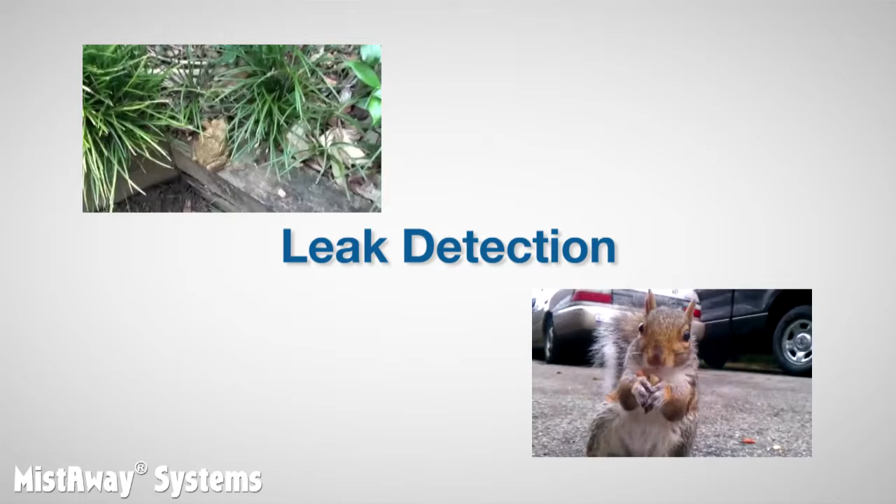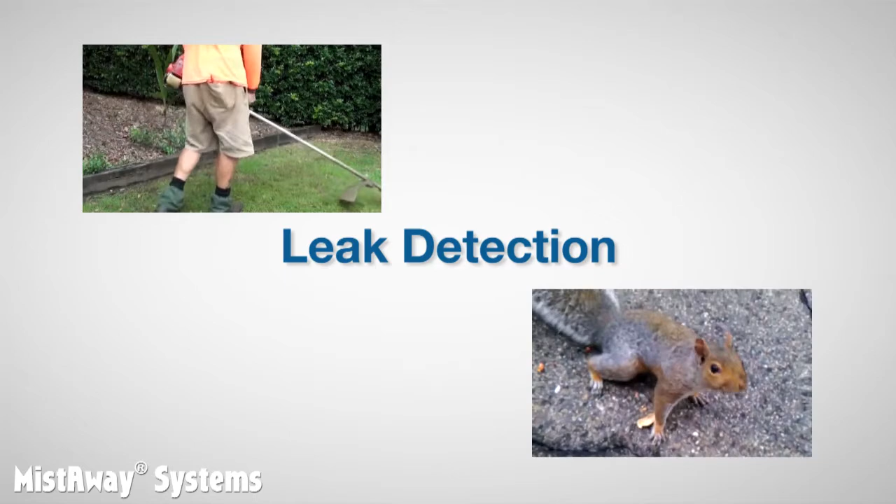And without the ability to detect a leak and shut itself off, a unit can empty itself in just a few mist cycles. Before we jump into discussing how leak detection works in the equipment, let's spend a minute contrasting a leak with the controlled flow that comes out of a nozzle during a mist cycle.

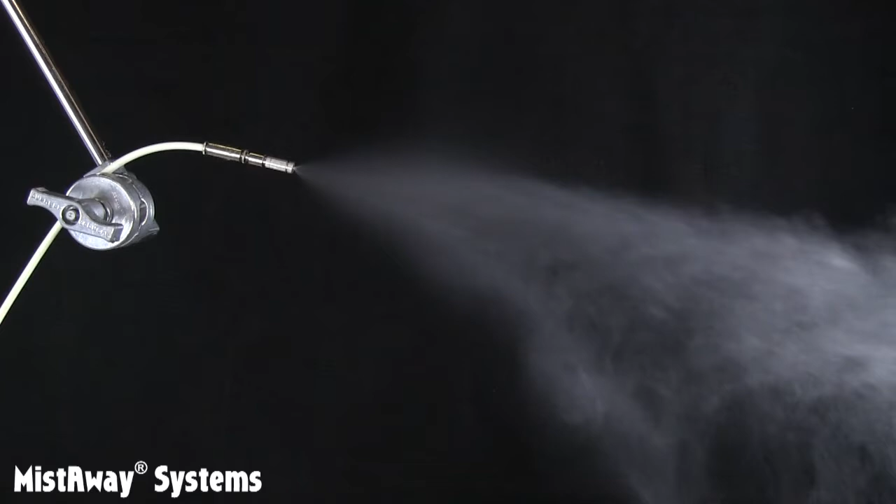Let's start by observing and measuring the controlled flow from a working nozzle. We've set the pressure at the pump so that this nozzle is operating at 200 psi. If we hold this graduated cylinder under the nozzle while it is misting, like so, and remove it after 60 seconds and read it, we'll know the flow rate out of that nozzle, 45 milliliters in a minute, right where it should be based on the chart we introduced in the fundamentals videos.

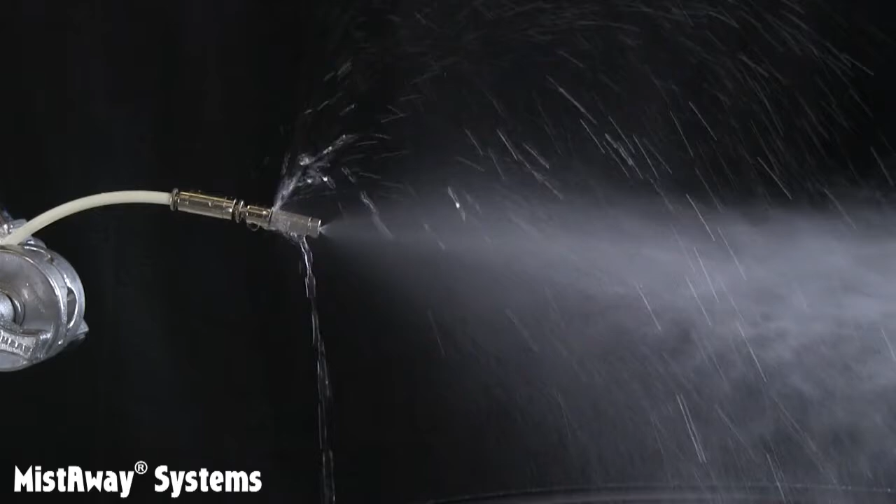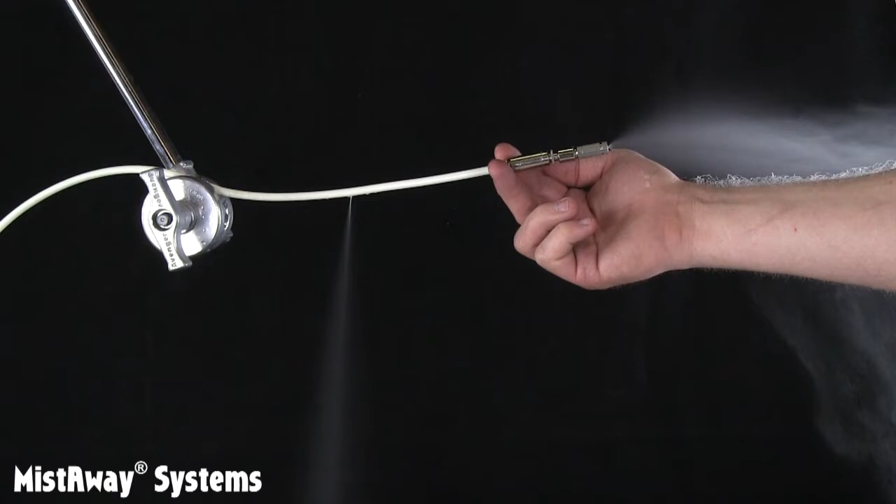Now let's loosen the nozzle tip a bit and simulate a substantial leak, like this. Let's measure this for 30 seconds. 900 milliliters in 30 seconds translates to 1,800 milliliters in 1 minute. Now let's try doing the same thing with a pinhole leak, like this one. 300 milliliters in 1 minute.

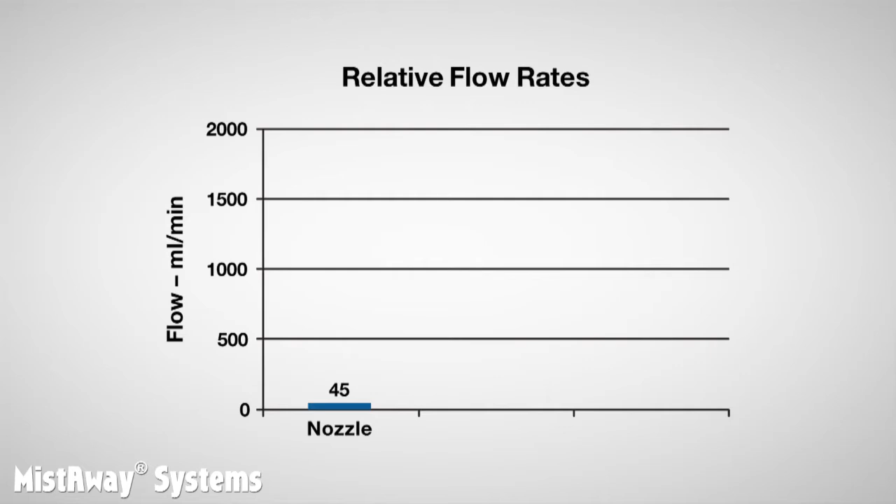So our single working nozzle flowed at 45 milliliters per minute. Our pinhole flowed at 300 milliliters per minute, about 7 times what our working nozzle flowed. And our large leak flowed at 1,800 milliliters per minute, about 40 times what our normal working nozzle flowed. What can you conclude from this? Well, there is a lot more flow from a nozzle circuit with a leak than the predictable flow of the same nozzle circuit without a leak. And that is the insight that MistAway's leak detection is based on.

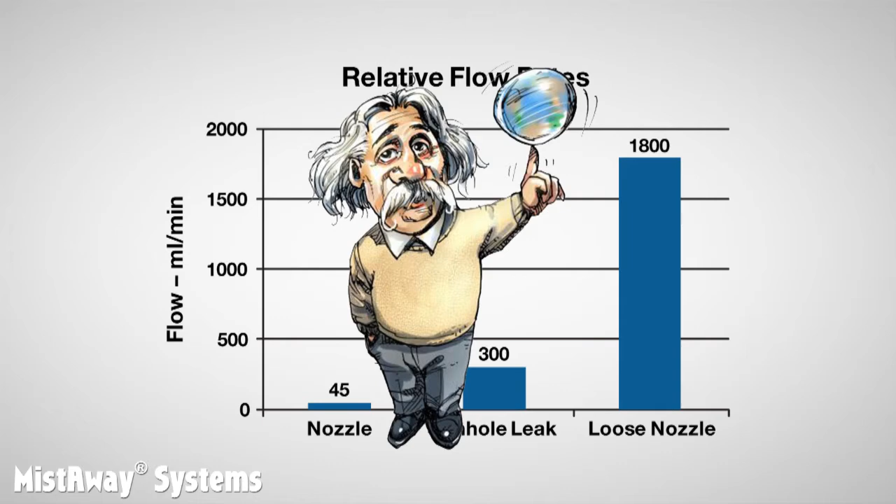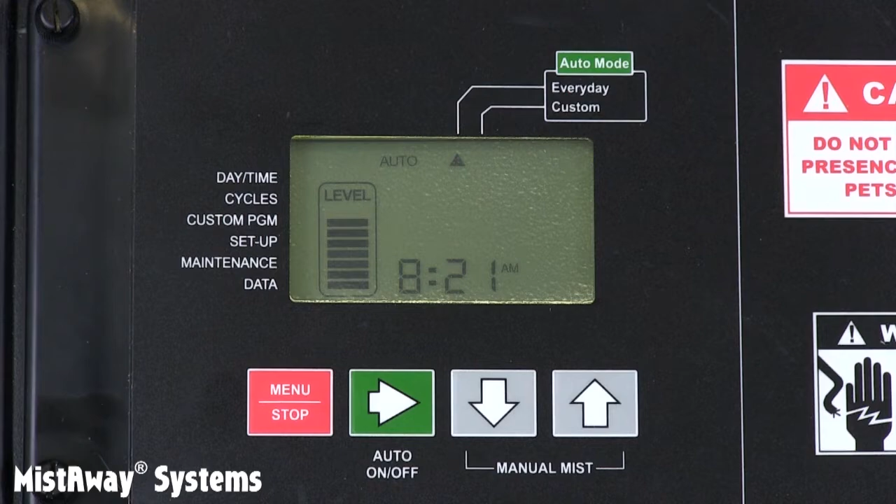Brilliant, right? So leak detection works by comparing a predicted flow to an actual flow after each mist cycle. If the actual flow is much greater than the predicted flow, the controller detects a leak. The unit shuts down and flashes error 3 until it is manually reset. So let's talk first about predicted flow, then actual flow, and then how the controller makes the comparison.

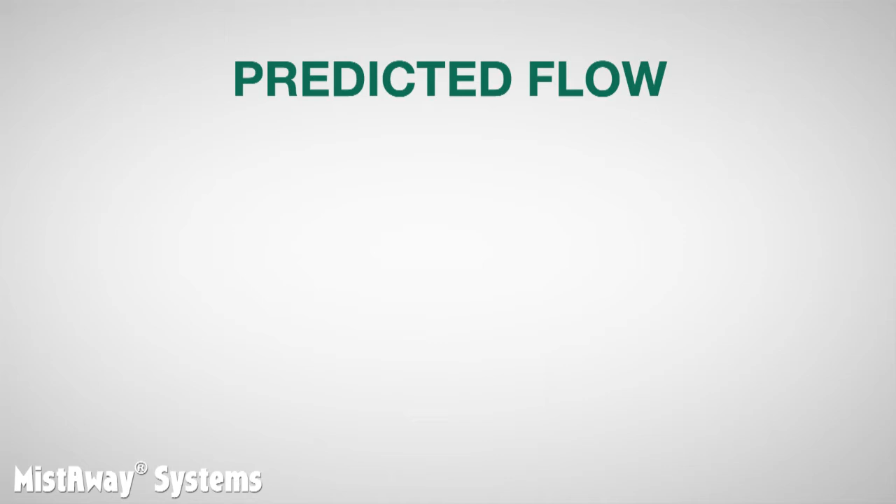The controller calculates the predicted flow from a nozzle circuit by multiplying 3 variables together, all of which it knows because they are programmed into its memory. First, what is the flow rate of the average nozzle? As we discussed in the fundamentals videos, if the nozzle circuit is installed as it should be, the flow rate is pretty guessable, about 40 milliliters per minute. In another video, we'll tell you how you can calibrate the flow rate of your nozzle circuit and change the average flow rate value, what we call the AFR, in the data menu of the controller, so that it reflects the average nozzle flow rate on your installation.

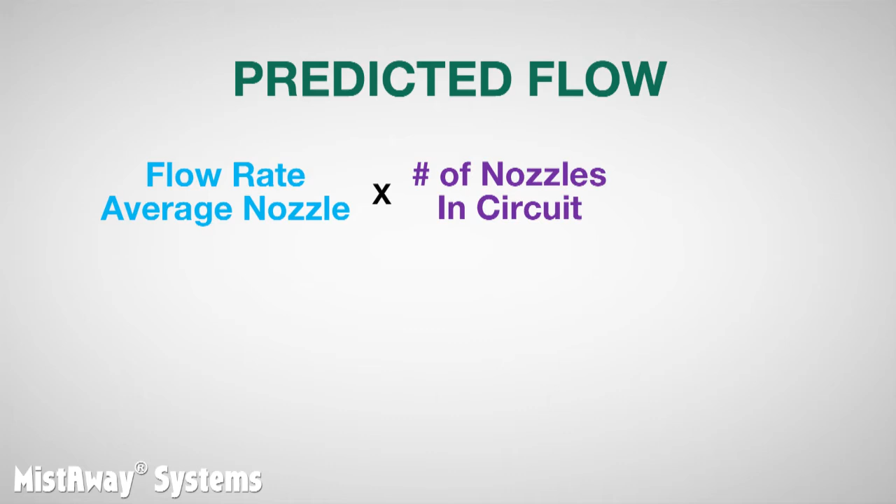Second, how many nozzles are installed? You can count them, and you're required to program that number into the controller during the setup process. And third, how long was the mist duration? Whether it was a scheduled mist or a remote mist, that number is knowable because it is programmed into the controller, again during setup. Multiply these 3 values together to calculate the predicted flow.

A sample calculation for predicted flow for a 40 nozzle circuit, misting 40 milliliters per minute per nozzle for 1 minute would be 1,600 milliliters. Now let's talk about how the controller gets the actual flow to compare to the predicted flow.

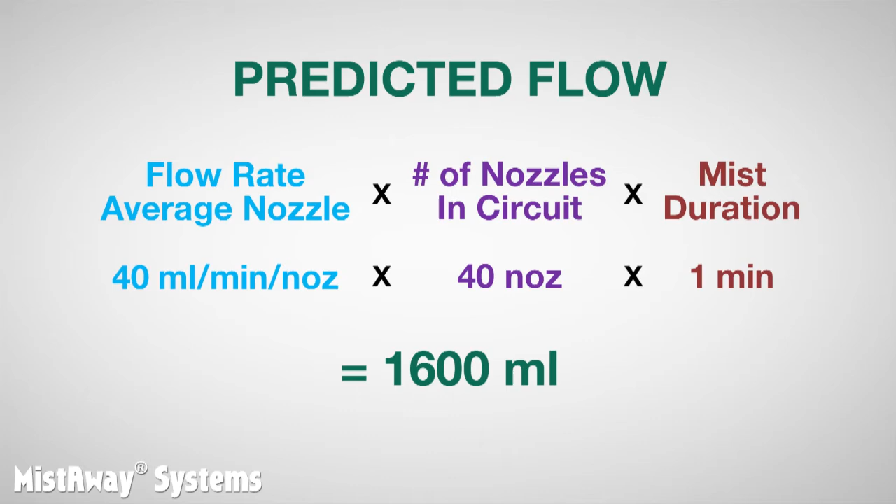The controller obtains its flow information from an electronic flow meter that looks like this. Water passing through a pinwheel in the meter causes the wheel to turn. Magnets on the outside perimeter of the spinning wheel create electronic signals that are counted and accumulated by the controller. The controller then turns that accumulated count into an estimation of the flow. Generally, for the flows we see in our systems, it is very accurate.

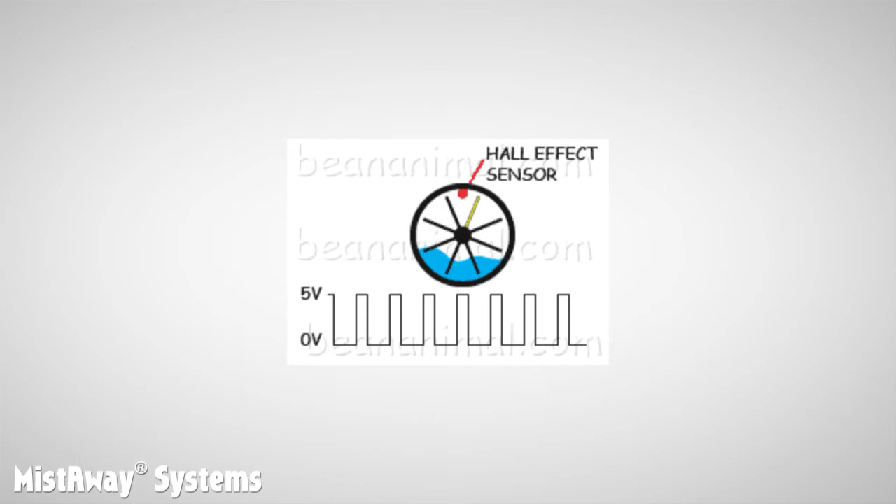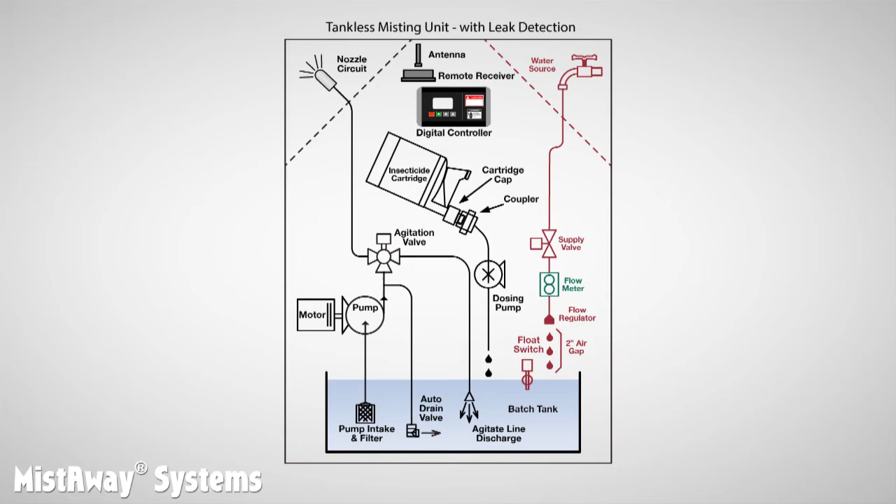But it also checks the value against the predicted flow. So this is an indirect measurement, since it's not actually reading the flow through the nozzle circuit, but rather it's reading the flow of the inlet water to replace what was misted out in the previous mist cycle. So we've established how the controller arrives at the predicted flow, which it calculates, and the actual flow, which it measures. Now let's talk about the comparison it makes.

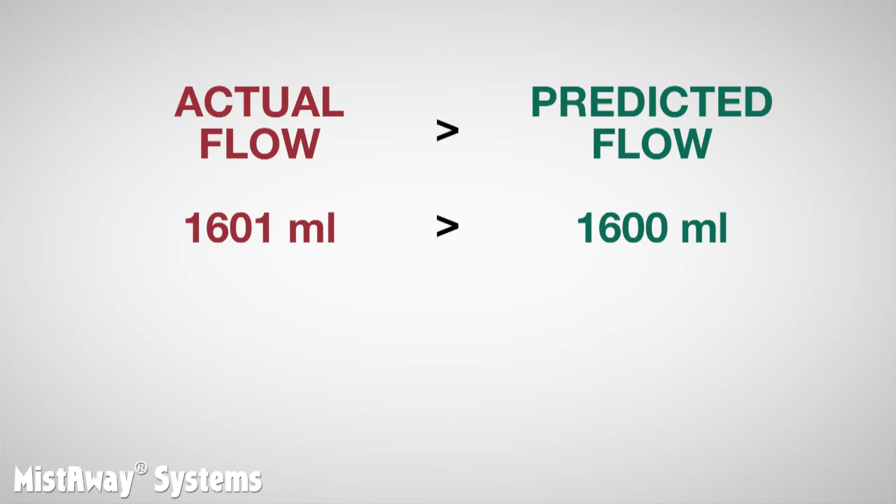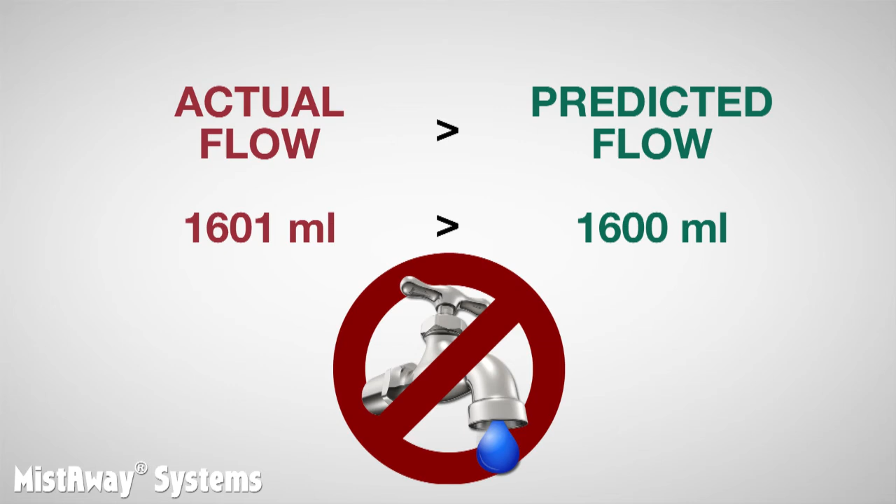Let's say the actual flow read by the controller was 1,601 milliliters, and the predicted flow calculated out to 1,600 milliliters as we did it before. Well, the actual flow is greater than the predicted flow. But would we want the controller to think it has a leak and shut the unit down? No. The difference needs to be much greater. There is the potential for error in both values. The estimated average nozzle flow rate and the predicted flow calculation could be a little wrong. Or like any physical measuring device, there could be errors in the flow meter reading and the actual flow.

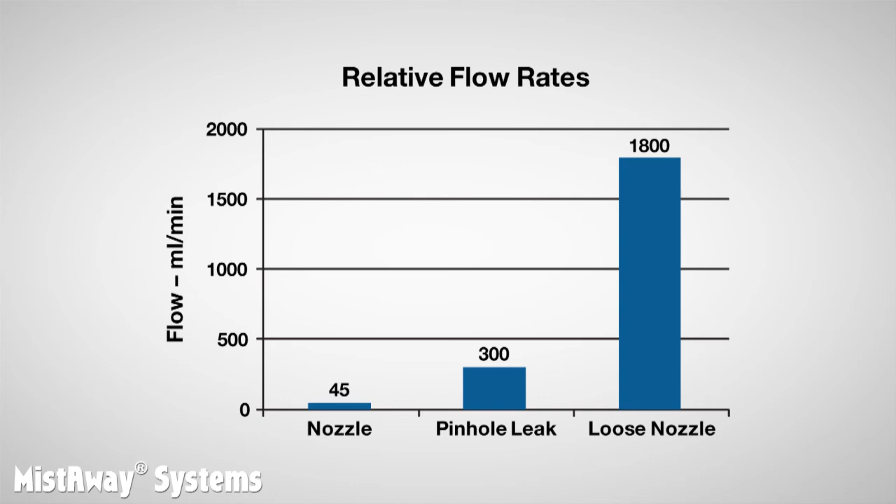Besides, as we learned at the beginning of the video, leaks aren't usually subtle things. When you've got a leak, there's likely to be a big difference between the actual and predicted flow. So to make sure the unit doesn't make that error in judgment, we apply what we call a tolerance factor to the comparison. This factor is expressed as a percentage of the predicted flow, and its default value is 75%. For the unit to register a leak, the actual flow has to be greater than 175% of the predicted flow.

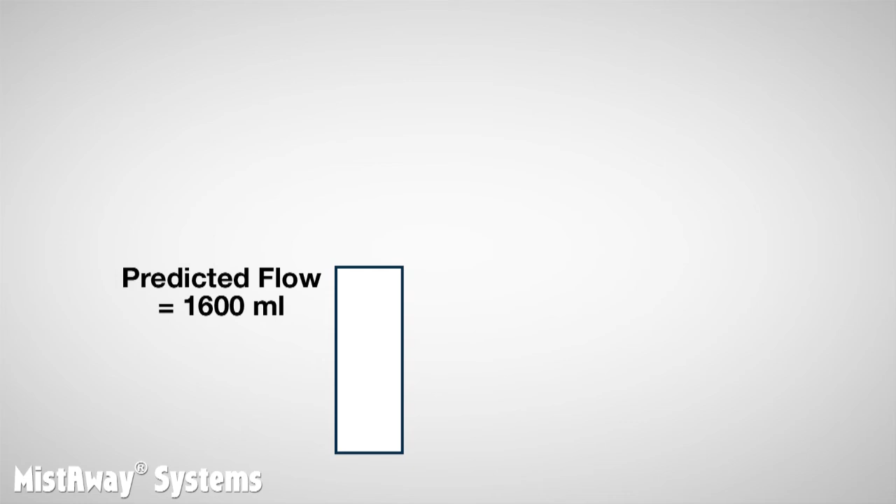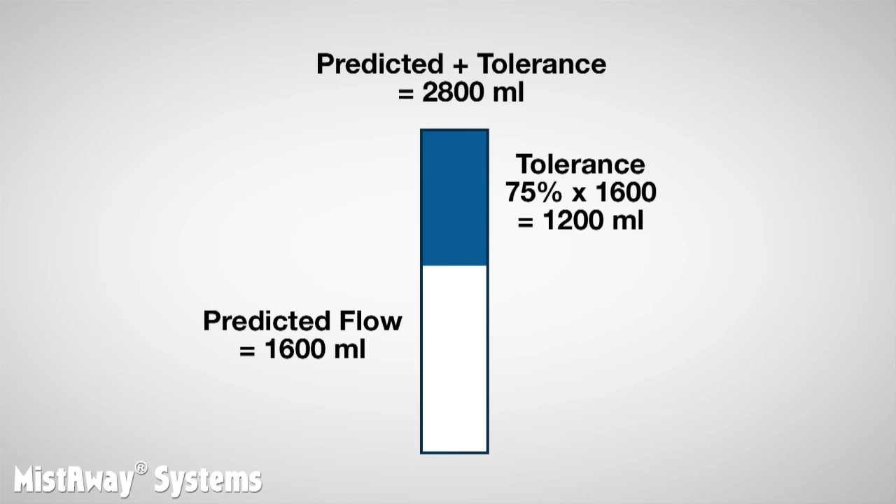To illustrate, let's go back to our example where the predicted flow was 1,600 milliliters. We calculate the tolerance as 1,200, which is 75% of 1,600. Then we add that to the predicted flow to get 2,800 milliliters. Now let's say the unit runs and the flow meter returns an actual flow of 2,000 milliliters. The controller then compares the actual flow to our 2,800 milliliter threshold. Since 2,000 is less than 2,800, the unit determines there is no leak, even though the actual flow is larger than our 1,600 milliliters of predicted flow. It was still within our tolerance.

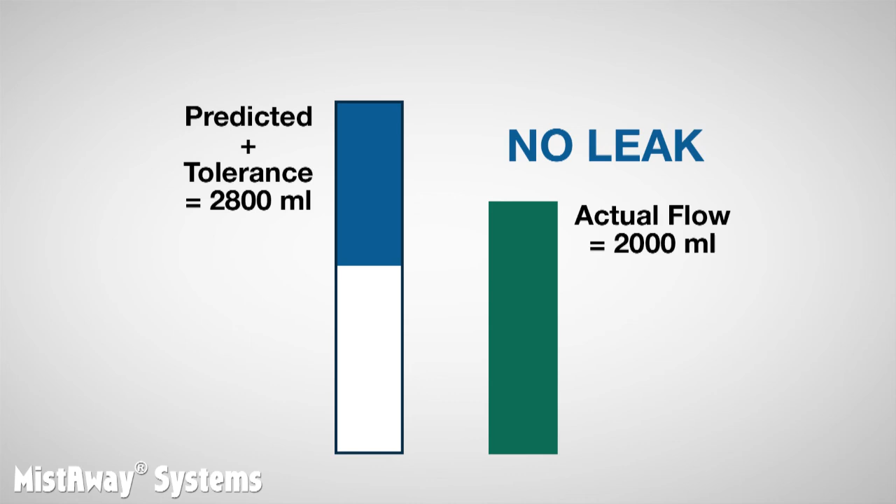Now let's say the unit runs and the flow meter returns an actual flow of 3,200 milliliters. In this case, the actual flow of 3,200 milliliters is greater than our 2,800 threshold. So the unit would recognize a leak, shut itself down, and annunciate a problem.

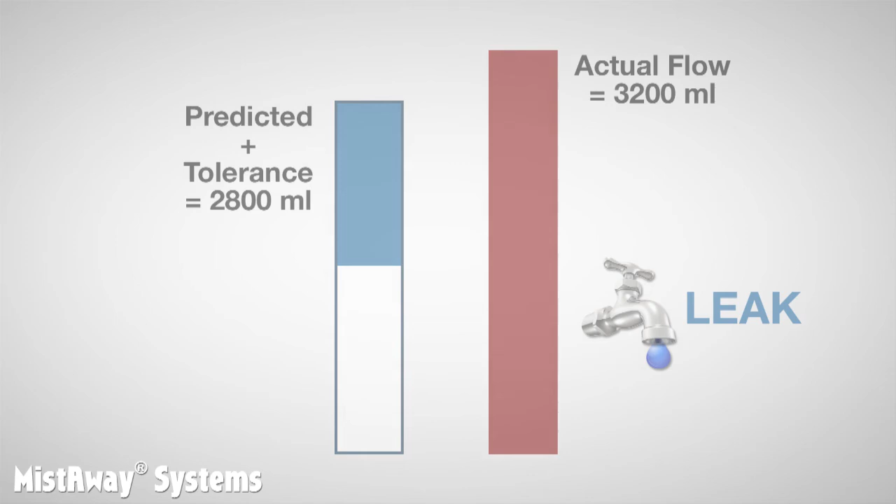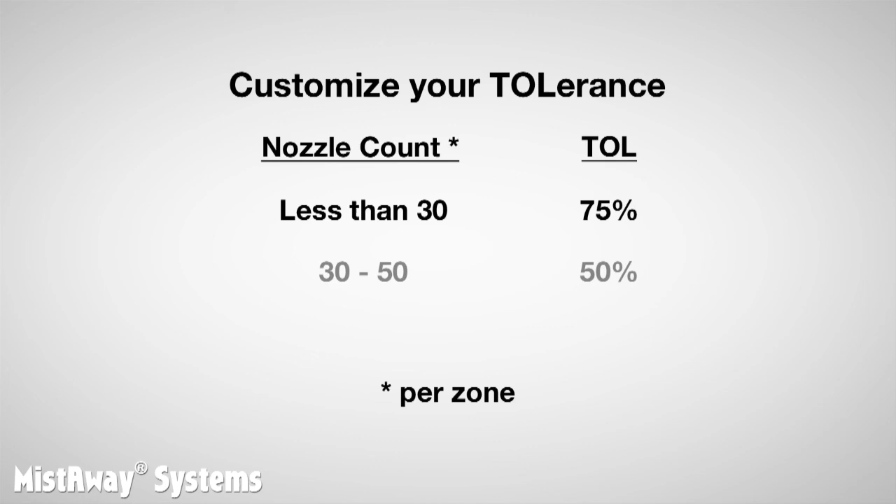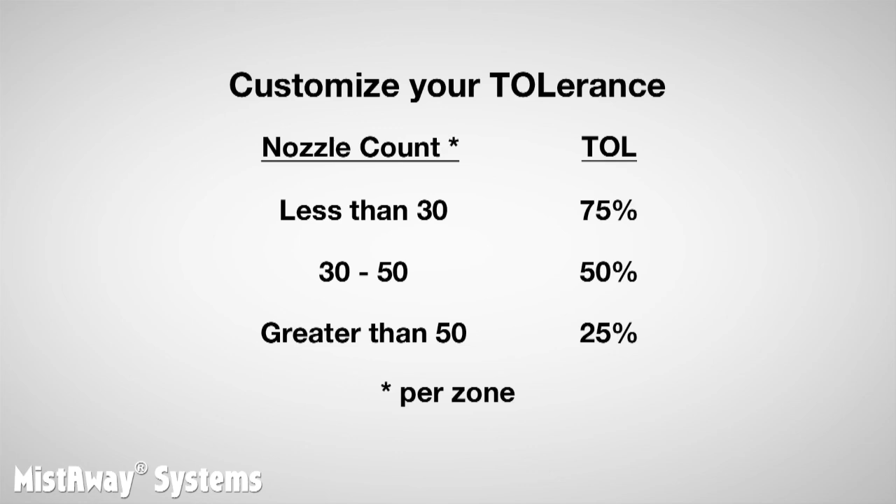If you've got an especially small or large nozzle circuit, it is a good idea to customize the tolerance level in the data menu of the controller. Generally, this means setting it at 75% for nozzle circuits that have less than 30 nozzles, 50% for nozzle circuits between 30 and 50 nozzles, and reducing it to 25% for nozzle circuits that have more than 50 nozzles. We'll touch on that topic again in the video covering initial unit setup.

So now you know how leak detection works in MistAway's drum and tankless units. We think it is an important feature and one that really distinguishes our equipment.